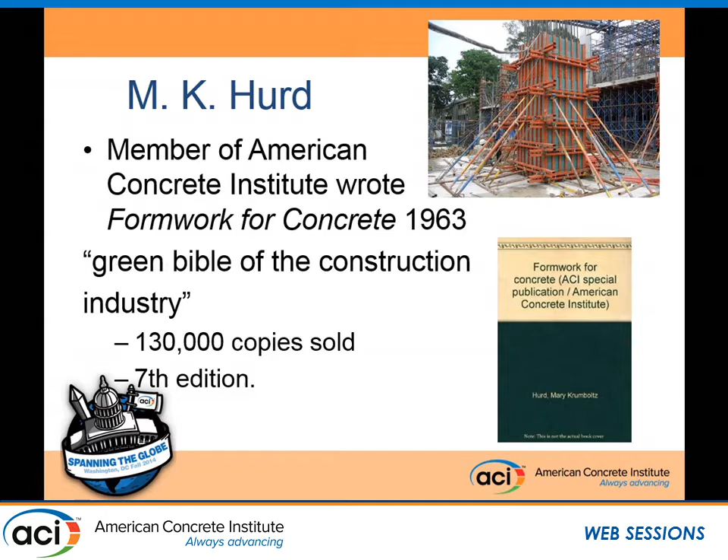It was known in construction communities as the Bible of the construction industry for the formwork details, design, materials, and planning of formwork. She was recognized alongside Thomas Edison by the Engineering News Record as one of the construction industry's top 125 people of the past 125 years.

She was the past president of the Concrete Improvement Board of Detroit, Michigan, and the Michigan chapter of ACI. She received Concrete Construction Magazine's Lifetime Achievement Award, ACI's Delmar Bloem Distinguished Service Award twice, and ACI's 1995 Henry C. Turner Medal.

She received several construction awards, and she was recognized in her industry not only as a pioneering woman, but an expert engineer. She ironically was asked to be a keynote speaker several times for the Engineering Society Tau Beta Pi, and she also spoke several times for the Society of Women Engineers.

She was a life member of the American Society of Civil Engineers, the Precast Prestressed Concrete Institute, the Construction Writers Association, and the Concrete Society of the United Kingdom.

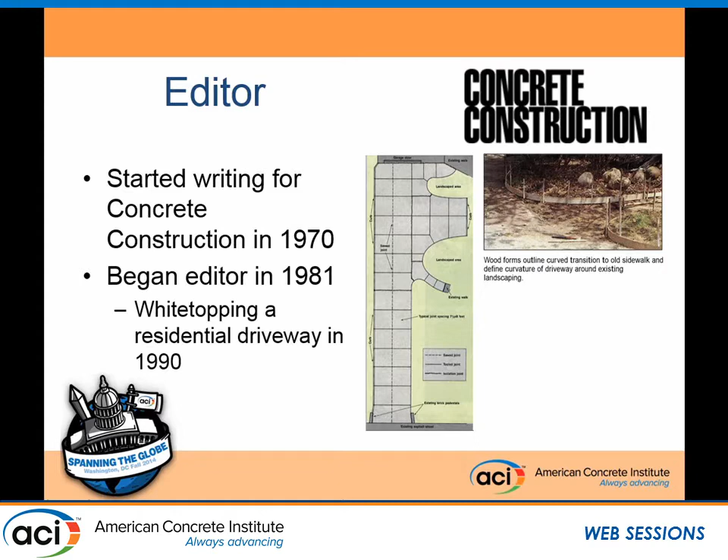So I only fortunately got to meet Mary for a short period of her life, but she really impacted me greatly through ACI 124. I know others have much better stories than this. One of the last ones that I wanted to share with you was her working with several individuals on formwork, and usually, if we had a chance, we'd ask her to sign our formwork book.

Most of the men engineers or contractors later found out, after she had written it and how well written it was and followed, that they admired her greatly and would ask her to come to the job sites to work out details when needed. This is an image of her just a few years ago on a job site, working out some of those details.

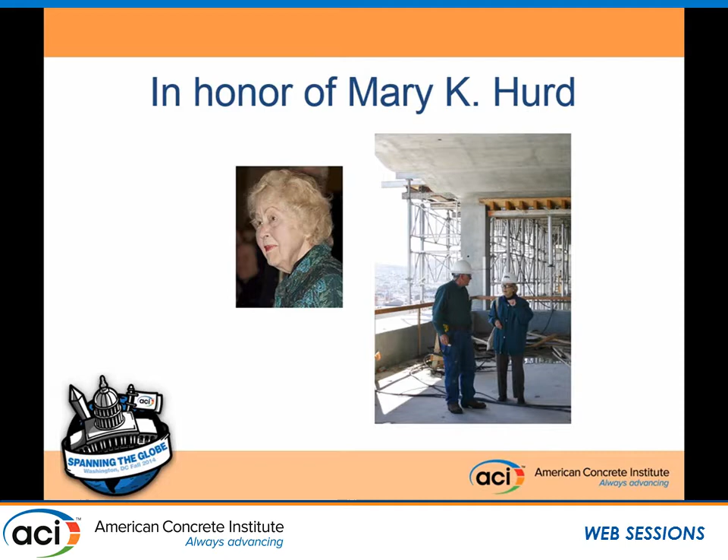Hi, I'm Robert Weinstein. I'm a principal of Architrave Architects, and I'm here to tell you today about a project we did at Meridian Hill Park, which was to restore the concrete and try to patch to match. So that will hopefully answer your question.

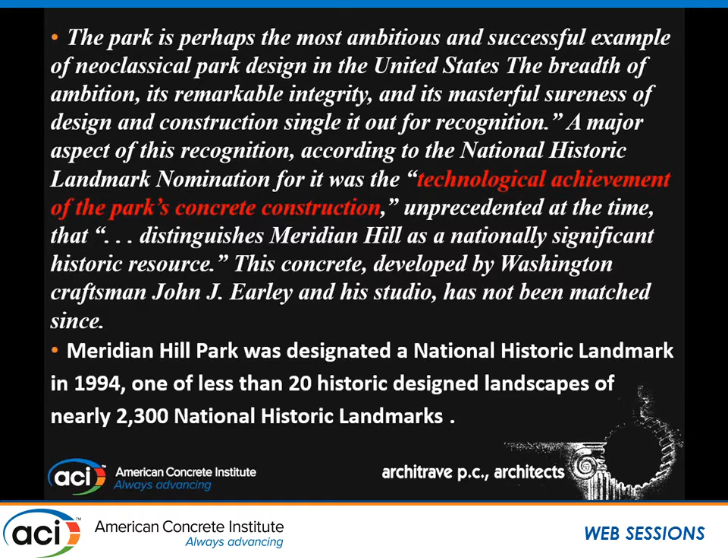Let's see, where are all these devices? Anyway, okay, that works. Meridian Hill Park is a National Historic Landmark, and it's because of its concrete. I thought that was pretty neat—to think about having a National Historic Landmark be one because of concrete. It may be the only one of its kind for that particular reason. And it was because John Earley was able to do such incredible things with the concrete.

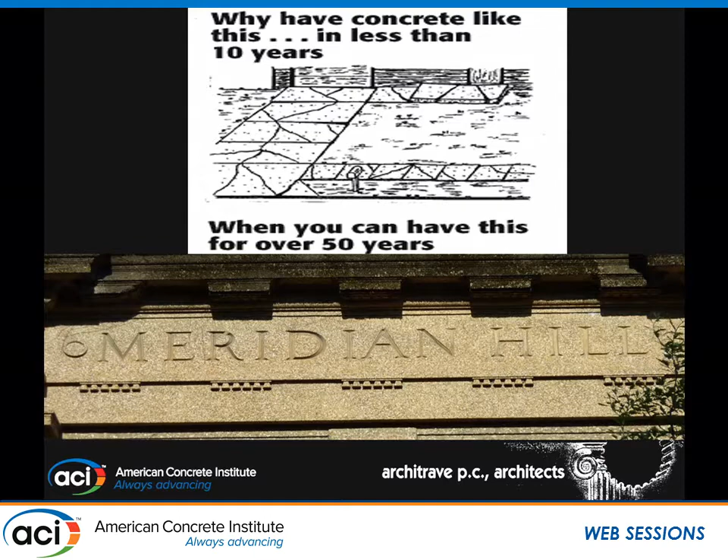You can see this is taken just within the last couple of months. This is one of the entrances to the park. Some of his concrete, which is over 100 years old at this point, holds up a lot better than some of the concrete I've seen poured in the last 2 years or the last 10 years. And it's really a remarkable achievement.

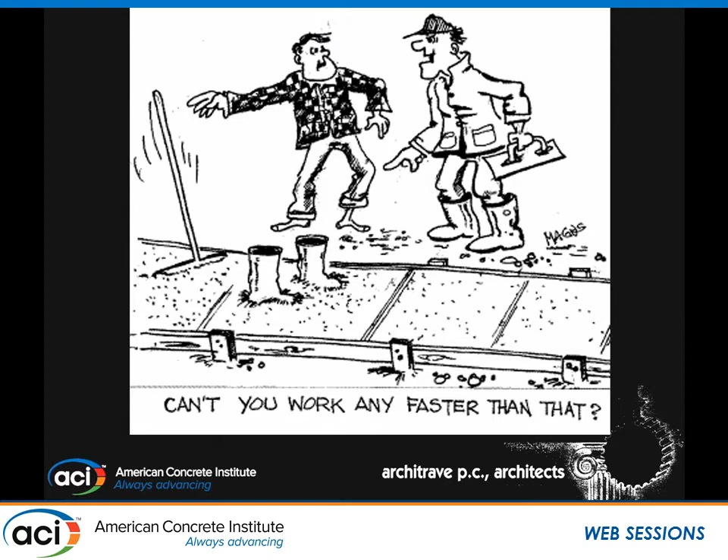It took about 21 years to put the park together, and I know there were several different contracts and several different contractors, and I'm sure that they were all on time and on budget, and that they tried to keep things moving a little bit.

We were very fortunate to work with the National Park Service, and we did several projects at the park, in addition to the restoration of the concrete. The first one was a cultural landscape report—if you don't know what that is, it's like a historic structures report, except it's for a landscape as opposed to just a simple structure.

We also did restoration of the lodge, and this lodge was just like an open gazebo before we did the infill work. That was to create accessible toilet rooms and a place for the park police.

In addition, we did a restoration of the fountains, and we also did a final project, which was correction of drainage and landscape drainage.

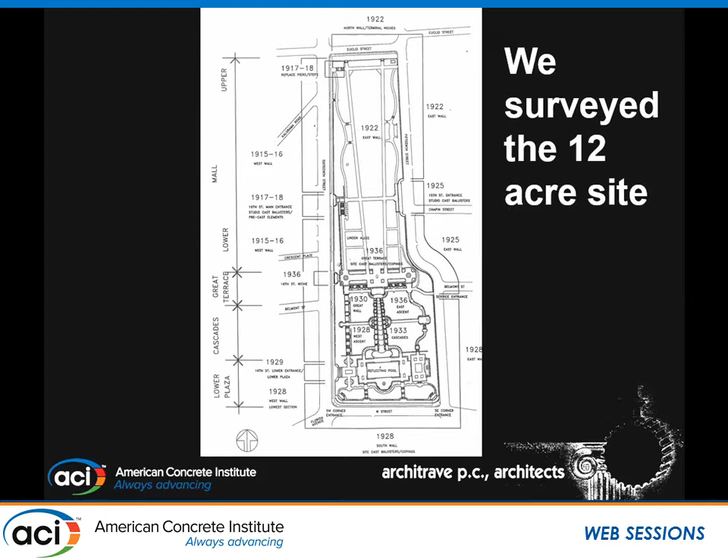So the park was a 12-acre site, and we divided it up into different areas relative to the different periods of construction. It also has an upper terrace and then a lower terrace and then the cascades and those sorts of things as well. But it was a 12-acre site, and we had to survey that entire site.

So the first thing that we did was catalog all of the mixtures that were used, and we gave them names. This is just a visual observation, just going out and visually looking.

Has everybody here been to the site, or has anybody not been to the site? If you've not been to the site, oh my gracious—if you don't do anything else while you're here in Washington, go to Meridian Hill Park and look at it. It's an Italian hillside garden in Washington, D.C., and one of the best kept secrets from all of the tourists. So go in the daytime, especially on a day like today if you can.

But when you look at it, it all kind of looks pretty much the same. And then when you start really looking at it, you start to appreciate all of the differences and all of the different aggregate combinations. So we did this survey, and then we gave everything a name.

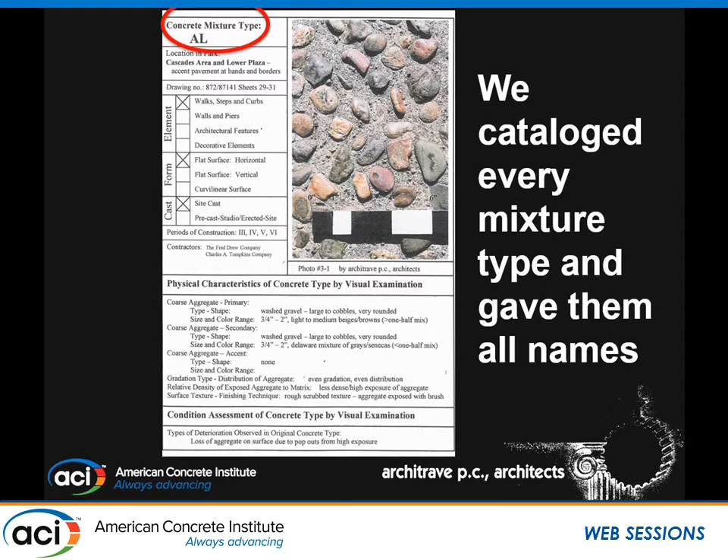This was the mix that we called AL, and that was our first, or one of our first mixes. It was kind of like Adam in the Garden of Eden, where we were naming all of the creatures, you know.

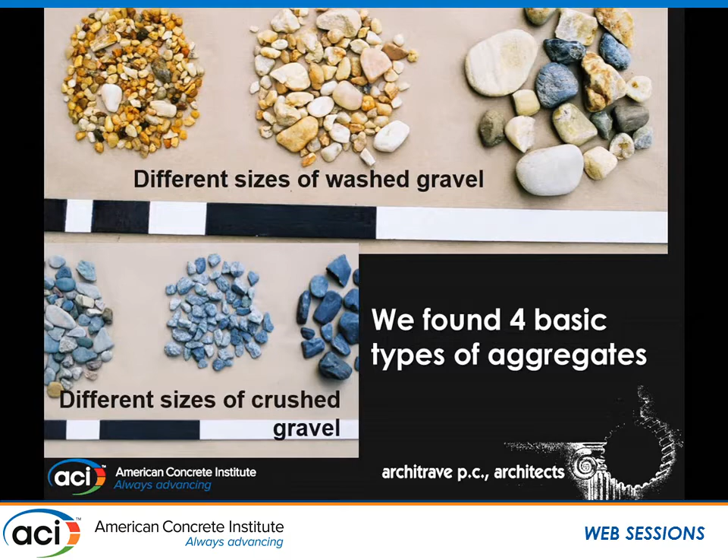So anyway, we found that there were really just 4 basic types of aggregates, and those were washed stone and crushed stone in different sizes. And then he added things to those—either quarry tile, or little marble chips—and then he would combine them in different ways.

I have this right in front of me. We inventoried the mixes which were used in each of the 4 types.

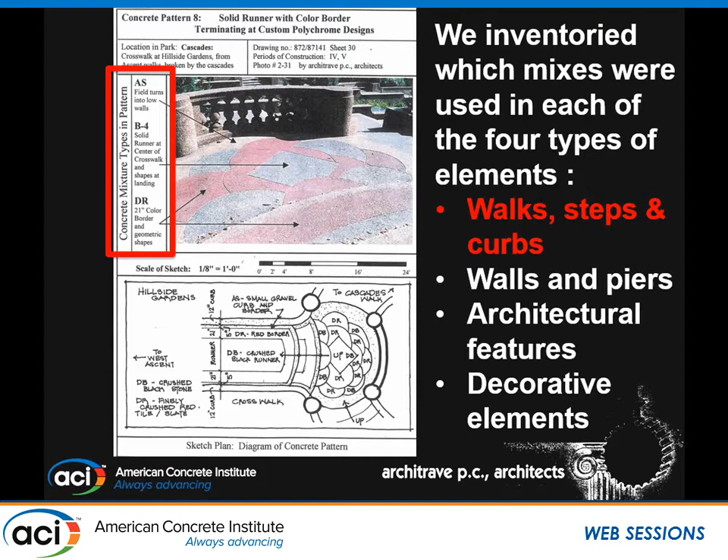In our cataloging, we divided up the surfaces into walks and steps, walls and piers, which were vertical, and curbs, which were horizontal. Then architectural features, and then decorative elements. The decorative elements were mostly precast, whereas most of the rest of the stuff was site cast.

Now I'm going to run you through a series of some of these decorative elements. You can see on our survey form this is a concrete mix, which is different. It's a decorative element, highlighted in red. We also identified whether the surface was horizontal or vertical, flat or curved, whether it was precast or site cast, and which construction period it was done in.

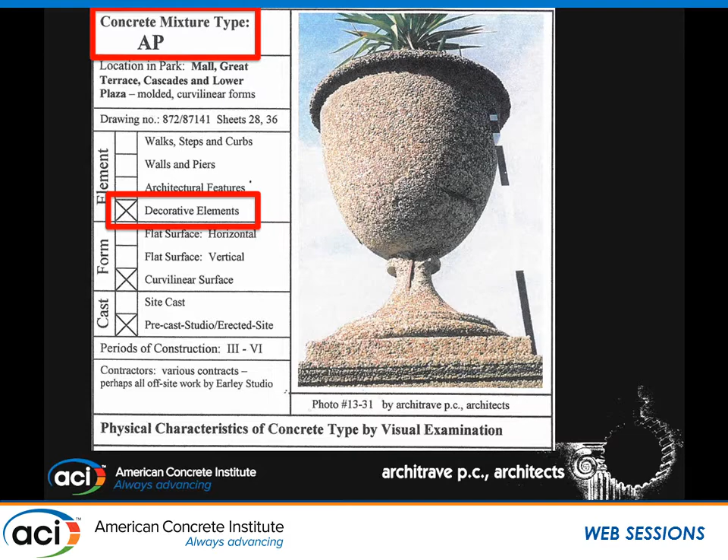So we had all of these different mixes and different types in different places in the park, which we cataloged. This is AML, good old AML.

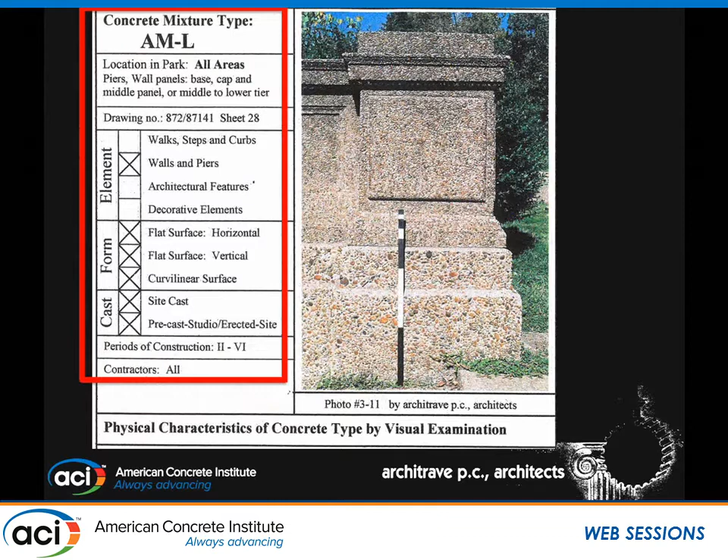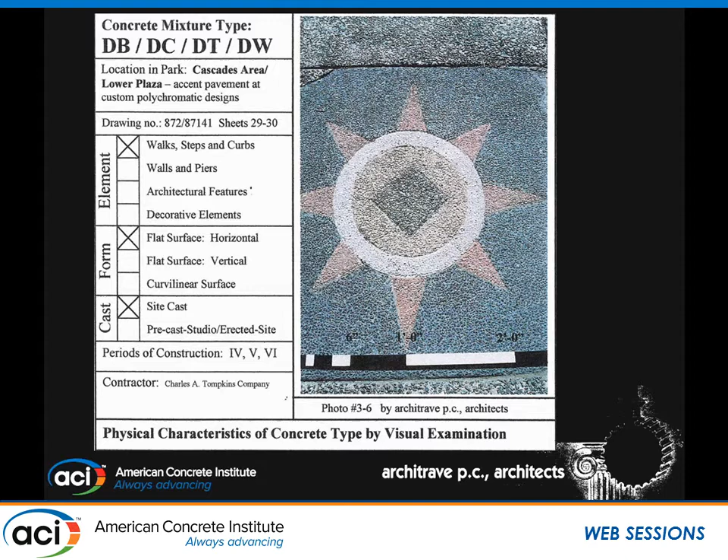And then here in the pavements we find a combination of a lot of different things to achieve the patterns. So we have a concrete mix DB, DC, DT, and DW all put together to create this beautiful pattern in the horizontal surface.

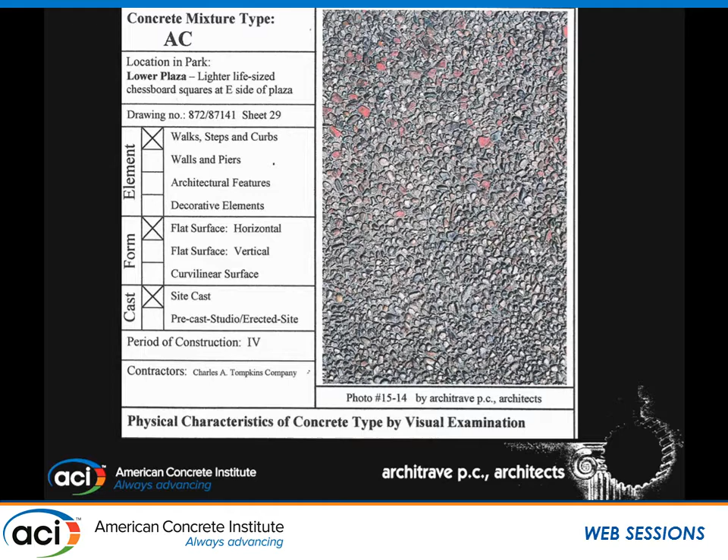After creating our catalog and naming everything, it was time to do a survey. And we did a very, very detailed survey. We surveyed every crack, every spall, every delamination, every place where there had been a previous repair that did not match, that hadn't been done properly.

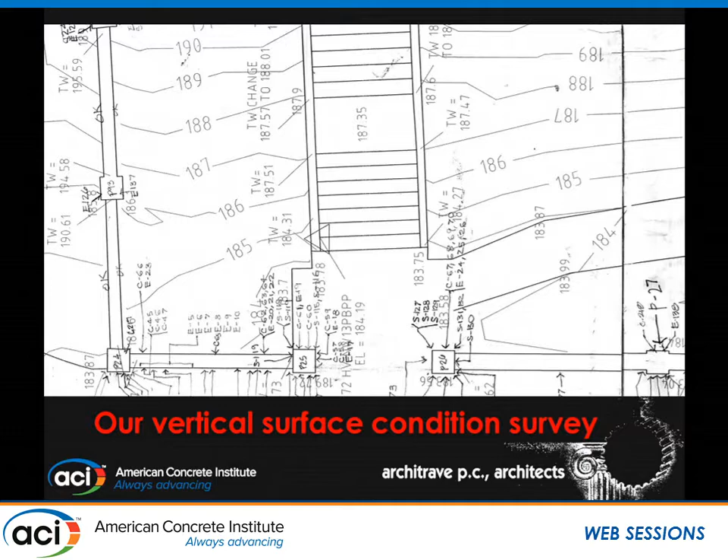This is a picture from the vertical surfaces survey. In addition, on the vertical surfaces, we noted how high we were above finished grade, because we're always thinking about what information a contractor needs to know when putting his bid together. If he's going to have to provide scaffolding to make the repair, that's a different situation than if he can just do it from the ground.

And this is our crew. They really got into the cracks. There were thousands and thousands of them, so they had to be dedicated. Some of the work was pretty cold, and we did some of it in the winter.

After spending all that time in the field, or even to come in and get warm, we took the information from our surveys and quantified it from drawings to spreadsheets. These are Excel spreadsheets, and every single crack was named.

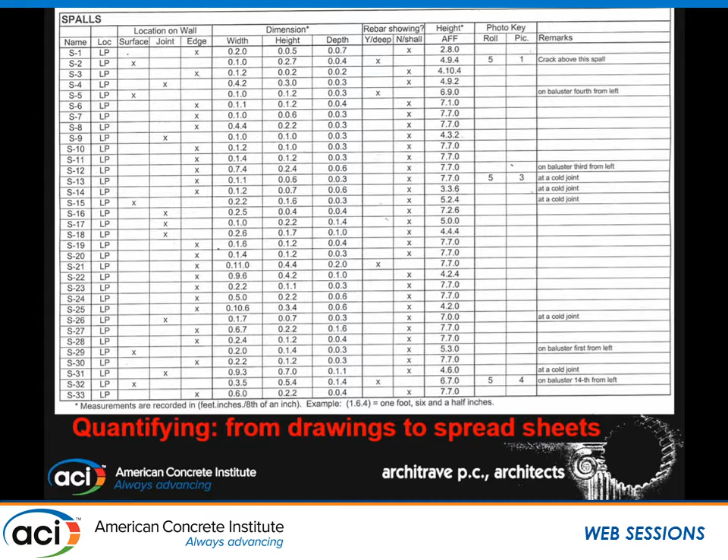If you know anything about fire alarms now, the big thing is addressable systems, where each device has its own name. Well, this was an addressable system. Each crack had its own name, each spall had its own name, and we had pages and pages and pages of definitions.

I know you're not really supposed to do this, but I'll just read you the slide because it summarizes what we did. There were 508 cracks, which took 16 pages; 17 delaminations, 1 page; 214 areas of efflorescence, 7 pages; 22 cases of previous repairs, 1 page; 661 spalls, 20 pages; 321 instances of deterioration of the piers, 11 pages; 97 instances of deterioration of the benches, 4 pages. A total of 1,840 types of deterioration and 60 pages of Excel spreadsheets.

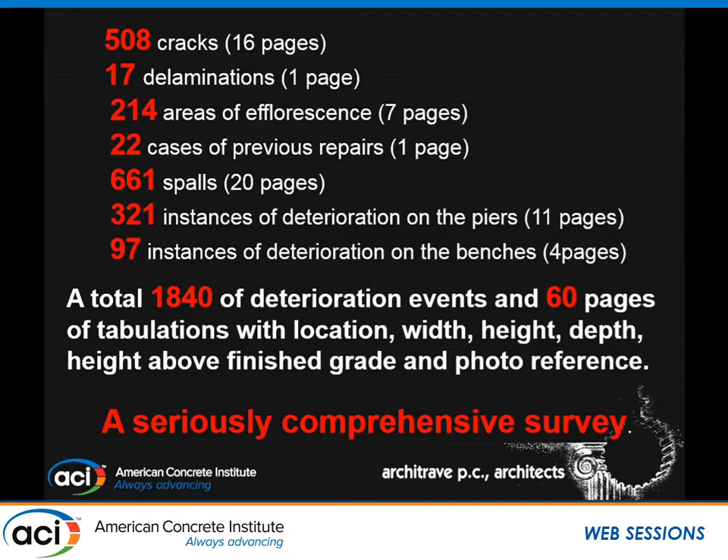We called this a crazily, seriously comprehensive survey. So now we had named everything, quantified and cataloged everything, and then we had surveyed everything to determine what the levels of deterioration is.

Now we had to start thinking about why it's deteriorating. So we got involved with CTL, the construction testing people, and they took core samples, both from the deteriorated pier you see here, and also core samples from a wall which was in good shape but built in the same time period.

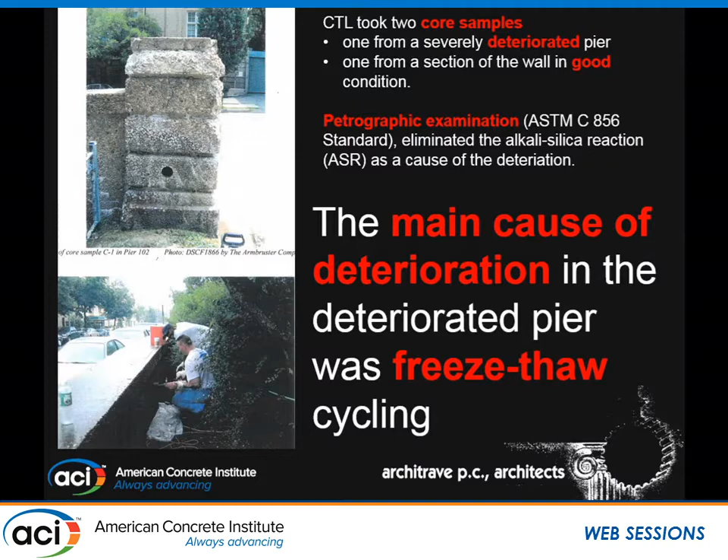The one thing this helped us do was eliminate ASR. This is when I first understood and discovered what ASR was, which is alkali-silica reaction. We said that's not the cause of the deterioration here. The main cause? Who knows, right? Freeze-thaw. As always, water is our enemy.

So you have to remember we were working for the National Park Service, and the National Park Service unfortunately never has enough money to do everything that needs to be done. And the National Park Service likes to document everything that they do and every decision that they make. So we created an evaluation matrix to help us decide what needed to be done first, what things we had to do, what things we might want to do, and what things were most important to do first.

And of course, safety was the first thing, and it trumped everything else. So if there was concrete that was overhead and it was spalling and it looked loose and it looked like it might be dangerous, that got a very high rating, and it got to be done. Steps, tripping hazards, places like that, those also got to be in the first order of priority of business.

But in addition to that, we were able to do what I called stitch in time, and this was mostly on the horizontal cracks in the pavement because it was such an extensive amount of work, where we just put in a flexible sealant that would help keep the water out and slow down the rate of deterioration. And then we were able to, as part of this first round of stuff, do a lot of patching and then the reconstruction of, I believe, 3 out of the 4 piers. And so that was kind of the entrances to the park.

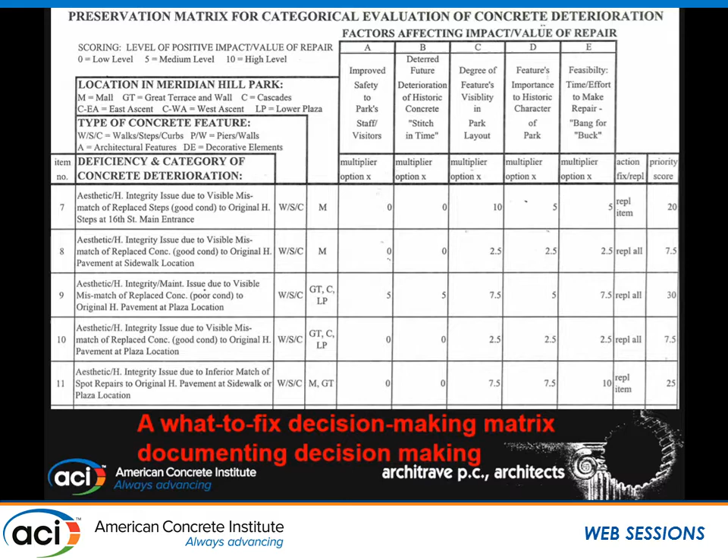We tested all of our proposed methods of repairs at the park. There was a lot of cleaning that needed to be done. There was heavy efflorescence, there was a lot of graffiti. And we followed the Park Service's guidelines and started with the gentlest means possible, which did almost nothing. And we ended up with a JOS machine, which is a kind of circular head. The Park Service had the machine, and you can choose different kinds of aggregates. It makes a big mess, but if you use walnut shells, they're eventually okay.

But the JOS machine was the only thing that could take off the really, really heavy calcium buildups where the water had been washing through the wall. And it would take off the graffiti, and you could control it and take off one level at a time without actually destroying the historic fabric.

On the horizontal and vertical crack repairs, I already told you on the horizontal the basic thing was just stitch in time. The vertical cracks, we ended up using Jahn patching material, and that was, they would get things that matched the color and matched the type of thing. But the hard work was the spall repair and the reconstructions, because we had to have mixes that would match and that would look right.

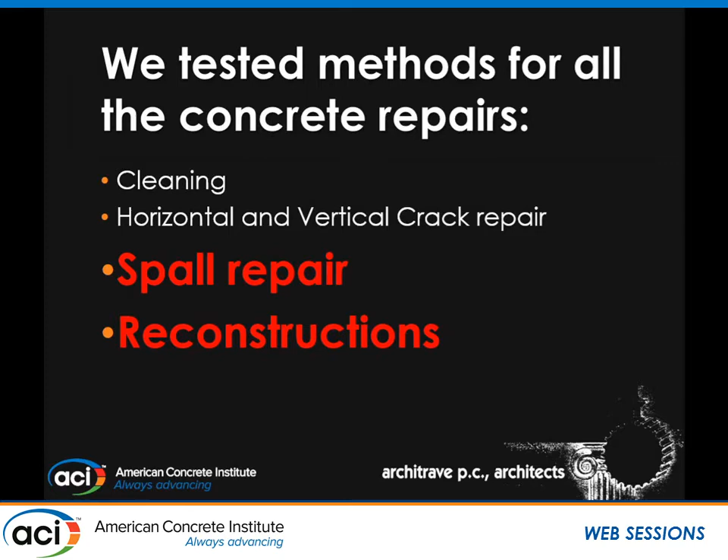So that's when we began working with Bob Armbruster, and Bob, I think, is here with us today, and I'm glad to see him here nodding, and I'm glad to see him again as well. And he really, in my mind anyway, is still kind of the #1 authority on John Earley's concrete, and he consented to work with us and help us figure out how to patch to match.

And out of the whole park, we picked the 12 most dominant mixes, and we tried to see if we could match those. So his job was to find the aggregates, and that was really the first really hard thing to do, and then to develop the mixes.

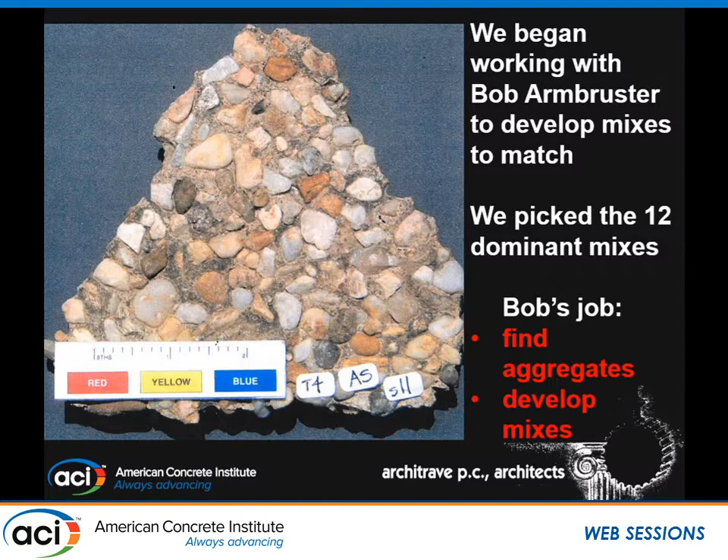We've already been told by the previous speaker that it's gap graded. This is a slide that Bob had created, which kind of illustrates what gap graded is. Basically, what I'm about to talk to you about is kind of what Bob went through. In order to find the aggregate, Bob took about 6 months.

He consulted with leading national distributors of decorative aggregates in the concrete industry. He ordered 100 and 200 pound bags of the 12 best candidate aggregates. He called all of the quarries and the stone suppliers listed in the phone books near the quarries that best match. He visited 6 other active quarries.

He made 50 different mixes from the best candidates and chose 7 suitable to match the target mixes. He made trips to 2 libraries of aggregates. He compared more than 700 samples. He searched through 250 photographs of decorative aggregates.

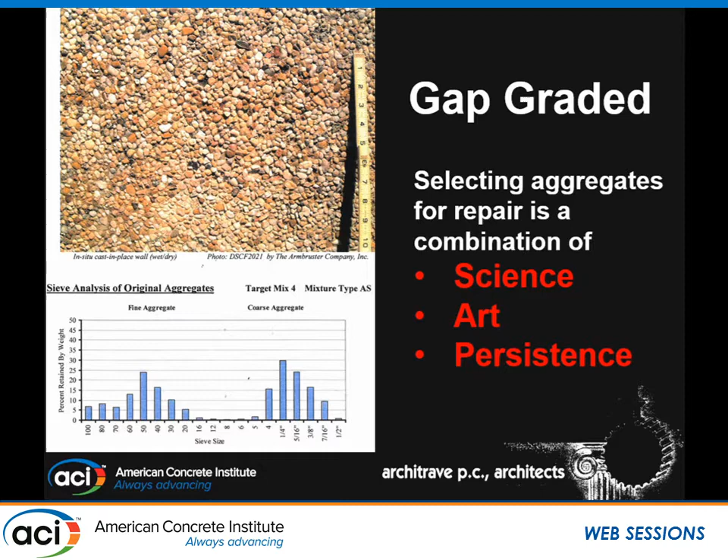He contacted the terrazzo houses that obtained samples from their libraries, and he contacted aggregate associations in Maryland, Virginia, and Pennsylvania, and the state geologists. He spent 6 months searching. And so, the takeaway: selecting aggregates for repair is a combination of science, art, and persistence. And I'd say that persistence is the really hard part of that equation.

And it was necessary because, remember, we're working up towards having a contractor do work. And we couldn't ask a contractor to do that work. I mean, where would he begin? How would we know, how would he know where to begin?

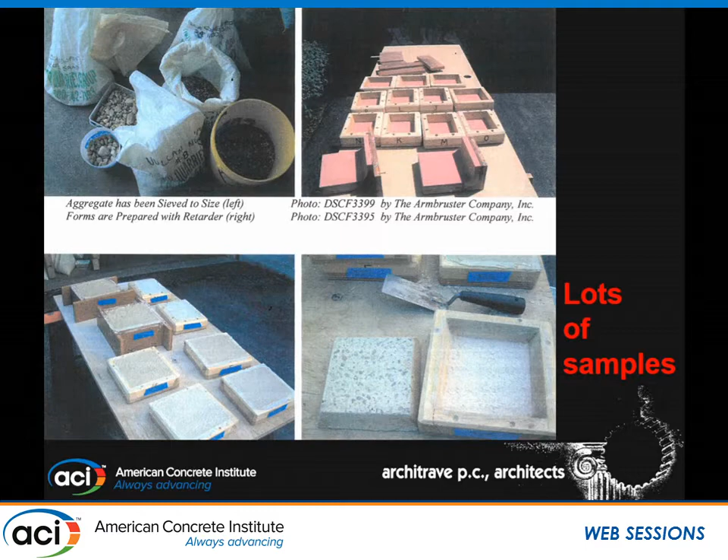And so Bob made lots and lots of samples. And then he made lots more samples. And here he made it, he was able to make mixes that match the historic mixes. And I spent time out there with him on the site, and we would go and we would look, and say this is a little too this, a little too that.

All of his mixes we recognized were never going to be like a cookbook, because a contractor faces humidity changes, and one of our best sources of supply, one of the quarries that Bob found, closed between the time he did his work and the time it went out to bid. So we knew the contractors would still have to do their own work and experimentation.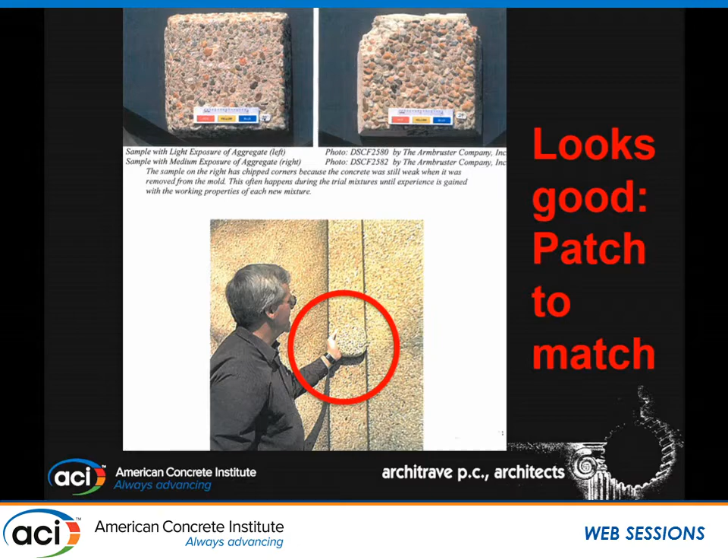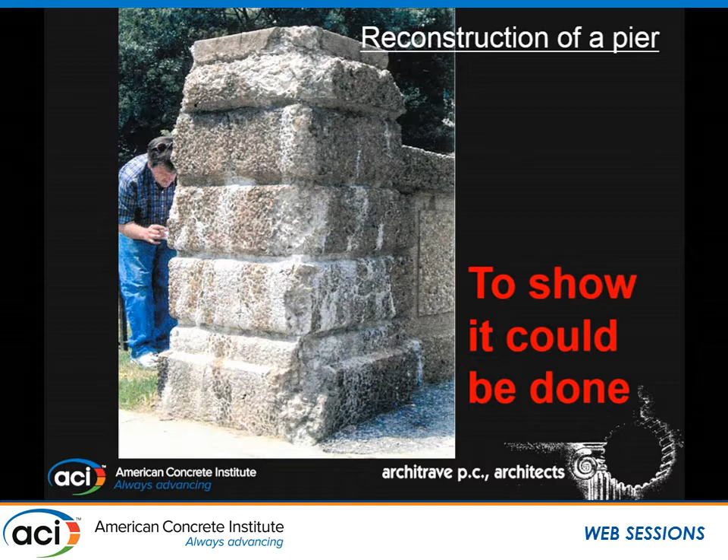Ultimately we made a board showing a range of different mixes, and the contractor could start with that as a starting point. The next thing we had to do was prove we could replicate the process and get the same fineness of edge and detail that Earley was able to achieve.

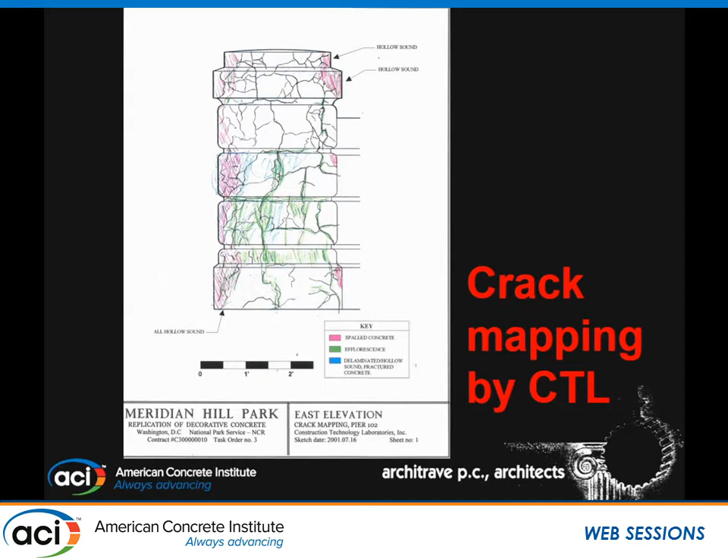Before we demolished a pier, we were going to reconstruct the whole pier. We wanted to make sure it was thoroughly documented. I always thought this was just a beautiful drawing done by CTL - it was crack mapping, done in color, very nicely rendered. And then, of course, the standard, highly dimensioned drawing.

We hired C.A. Lindman, a local masonry contractor, who took Bob's formulas and mixes and worked with him in his own way. He started small, making small pieces of formwork. His formwork was like cabinetry - it was beautiful. And these guys were great to work with.

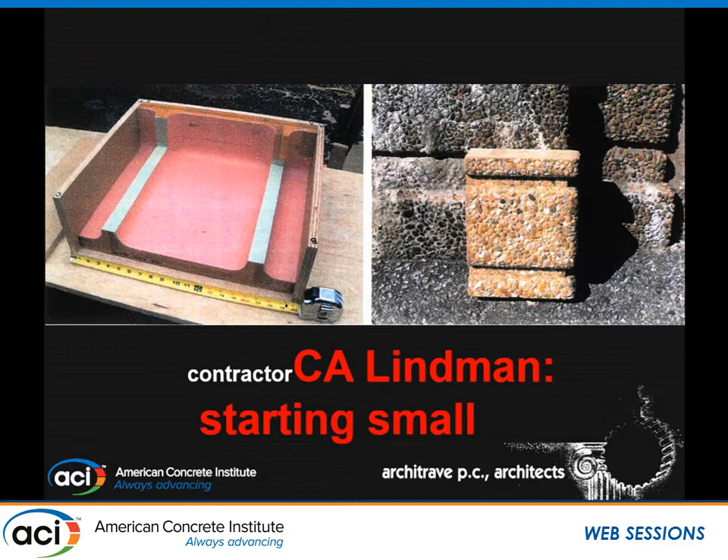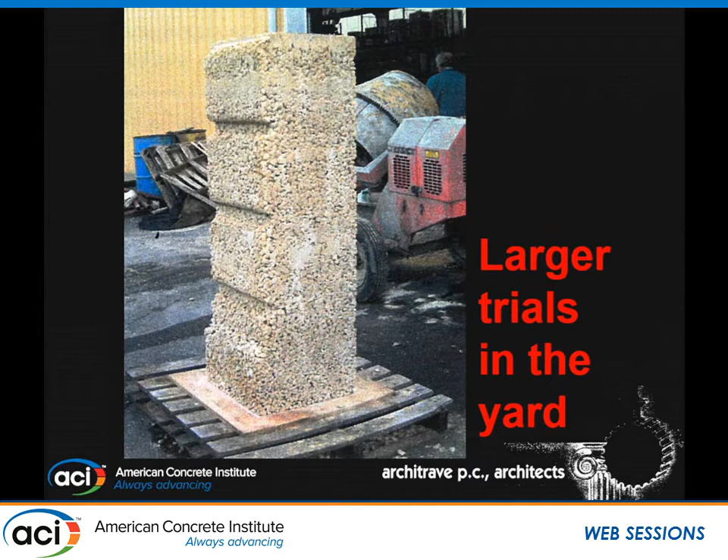They took their formwork to the site to check their results and see how it came out. Then they made larger trials in their yard to see what kind of problems they were going to run into, and lo and behold, they were able to do it.

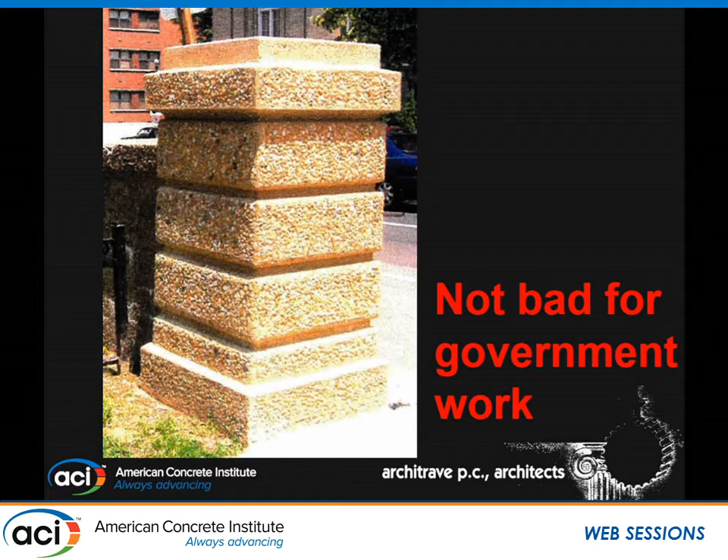We started this pier - this is a reconstructed pier - at dark, 1 a.m., because they figured how long it would take before they stripped the forms. Even with all their planning, the bottom hardened too fast, and they had to call somebody to bring in a pressure washer to get off the stuff that didn't come off with brushes. But they did a great job and got the results we wanted.

We documented every bit of it. Luckily - I say luckily - a piece of the corner fell off when they stripped the form. Why was it lucky? Because then we could figure out how to fix that, and we could document that process to tell the contractors before they got into it.

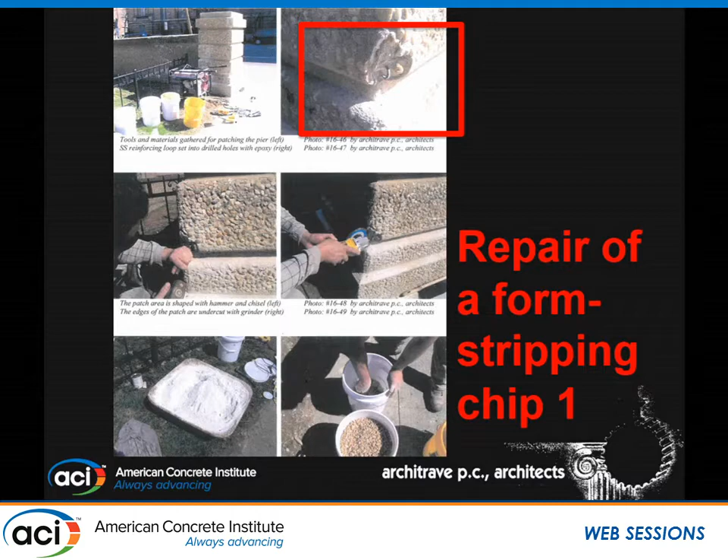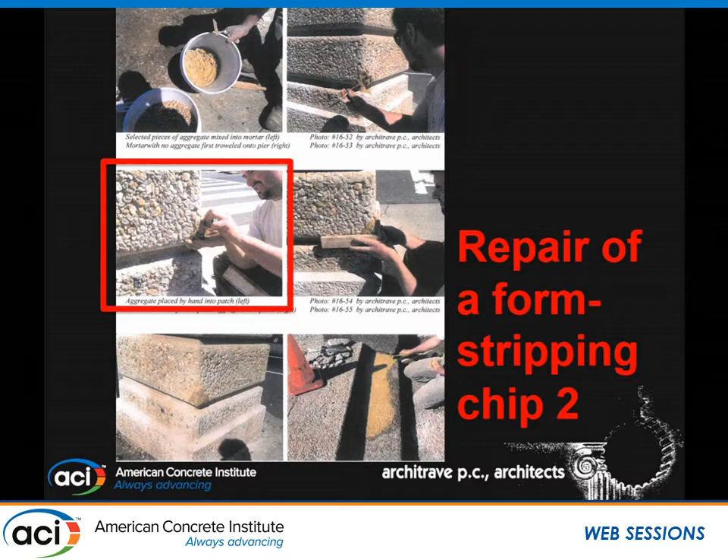Here are the workmen again, C.A. Lindman's guys, making this repair, hand placing every piece of stone to get it into the corner. Who would know? It looked pretty good to me.

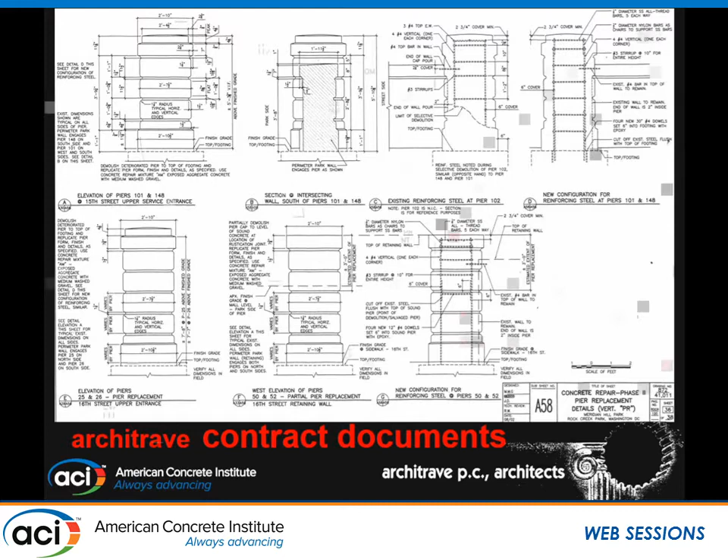This is a funny story about construction sequence, nothing to do with concrete. The contractor was anxious to get started and get some money, so the first thing he did was demolish all of the wood slats off of all the benches. Then he didn't do anything for about a year while he figured the rest of the project out. Believe me, the neighbors were angry.

Not bad for concrete. It's really a beautiful place.